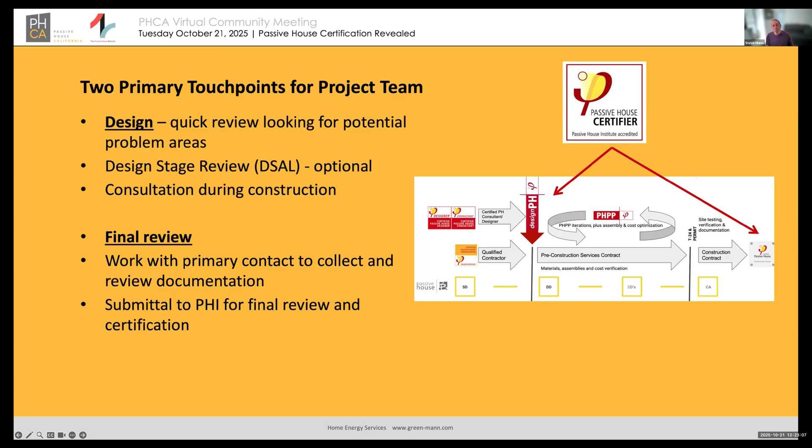Now, they reserve the right to review that final package. They may or may not do that. That's in our contract, that's an option. It happens sometimes. Other times, you send them a submittal package and it's like, fine, here's your certificate. So you never know what's going to happen, but that could be part of the process. Okay.

Let's talk about the big lift, the documentation requirements. There are basically 6 categories here. If you want to find out more, you want to download these 2 links. One is the building criteria. This is what you have to do in order to get a certified project. And the second one, the Passipedia document, is example documents. These are submittal requirements.

Question from Vincent: Am I more involved at the design stage for a remodel, e.g. to provide pre-certification? No, not really. Most of my projects are new construction. I've got a couple of remodels that I'm doing, and the amount of involvement as a certifier is about the same. It's not a big difference, really. I think that's a pretty accurate statement from my experience. My remodel experience is limited.

I'd say maybe 1 in 10 projects is a remodel. I'm doing 2 EnerPHits right now, maybe 3, maybe 4. I have to go back and look at my project list. So yes, I am doing some.

Okay, documentation. That's one thing. I'm just going to go through this. There's the documentation, there's the modeling plus auxiliary calculations, there's specifications, there's a bunch of MEP stuff, construction photos, and testing and commissioning reports. Those are the categories of the things you need to submit to a certifier.

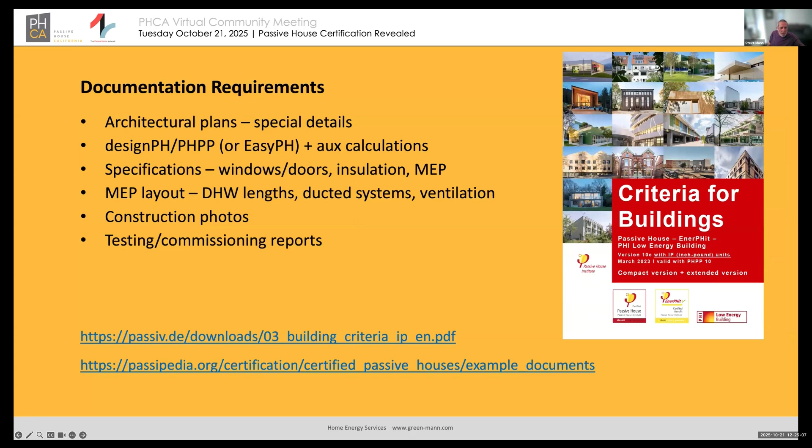Okay, architectural plans. The site plan has to have, and again, these samples that I'm showing here are from this second document here, the Passipedia document. So you don't need to study these slides. There's more information in the Passipedia document. I'd recommend you download it and read it. Okay. You have to have a true north designation. You have to show neighboring buildings. You have to show shading obstructions and an outline of the building highlighted.

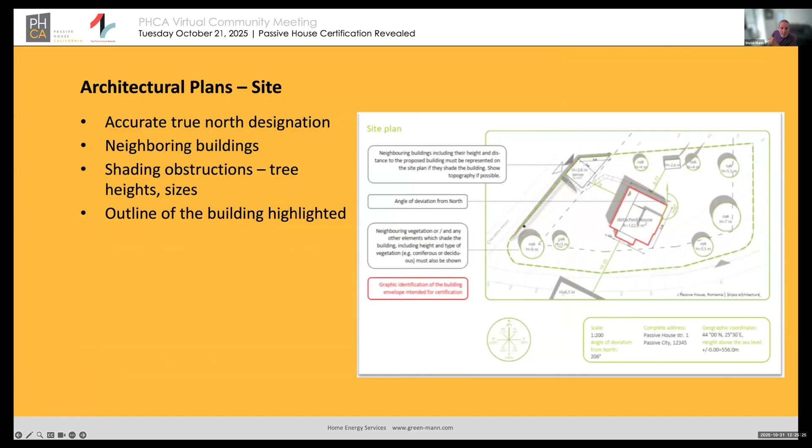Okay. For the floor plans, you need to outline the thermal envelope and the air barrier. And we typically recommend you do it in separate colors and identify them. Okay, and this is just one sample. We would like to see dimensions for the thermal barrier because that's really what we measure when we're certifying a building, and that's what the consultant should be measuring. Sometimes you get that, sometimes you don't. You know, as a certifier, you learn to deal with it.

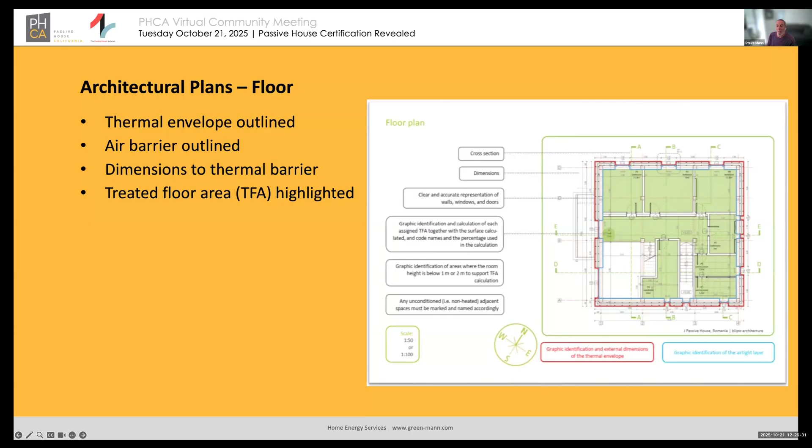The other thing we want to see is a treated floor area that's highlighted. Now, treated floor area is an interesting little art and science all to itself. You just have to figure out how to do it. I'm not going to delve into it any more than that. Okay, but we need a clear representation of what the treated floor area calculations are. We don't want to do those ourselves. The consultant or somebody needs to do that and make it clear, because all of the calculations in the PHPP, or virtually all of them, rely on an accurate treated floor area number. So that's got to be right on, 99 to 100% accurate. And we check that very closely.

On the sections, same things. We want the thermal barrier and the air barrier outlined. We want materials listed. Now, this can come up on the sections or it can come up on the details, and I'll show you details in a minute. Okay. Again, dimensions of the thermal barrier. And we want to see materials here that match the materials in the details.

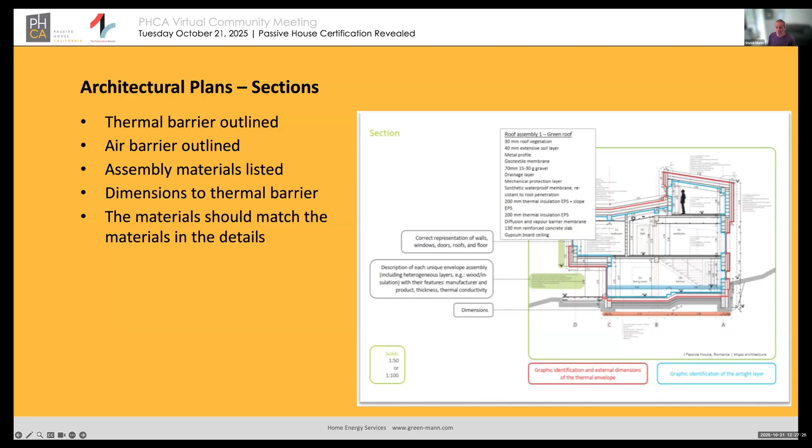If I see you identify, say, rock wool insulation on the outside in a section, but then in the details you call out plant-based material of some kind, it's clear to me that somebody's not keeping stuff up to date, and I don't know what you actually built. Okay, to me, that's a red flag that says somebody's not keeping track of stuff or taking care of business. So I'm going to look at things a lot more carefully because it's an indication of sloppy work. So I want the materials to match all the way through.

Here's a sample of some details. We need to see details again with the thermal and air barriers marked, the materials called out, dimensions, especially on door and window details. We want to see reveal dimensions because they can have a significant effect on your solar radiation. And again, I've already said this, the materials in the details should match the materials in the sections, and as you'll see later on, the materials in the specifications.

Mark, is this level of detail required for all projects, including EnerPHit? It seems like this level of detail is a major barrier to scaling passive house. Good question, Mark. It actually is a bit of a barrier initially. It is required because we need to know exactly what's in the building, you know, in all places.

What I found is once a project team, and especially a passive house consultant and an architect working together, have done this a few times, they develop a set of templates, a set of standard details. It's just like structural engineers. You get a set of structural plans, you get two plan sheets that are project specific, and then you get a third plan sheet that is basically boilerplate stuff that may or may not totally apply. The architects that I like working with are the ones that know how to do this, and it doesn't present a great burden to them. But the first time you do a project, and I've done this with some architects as well, it can be a pain in the butt, but it is pretty much required.

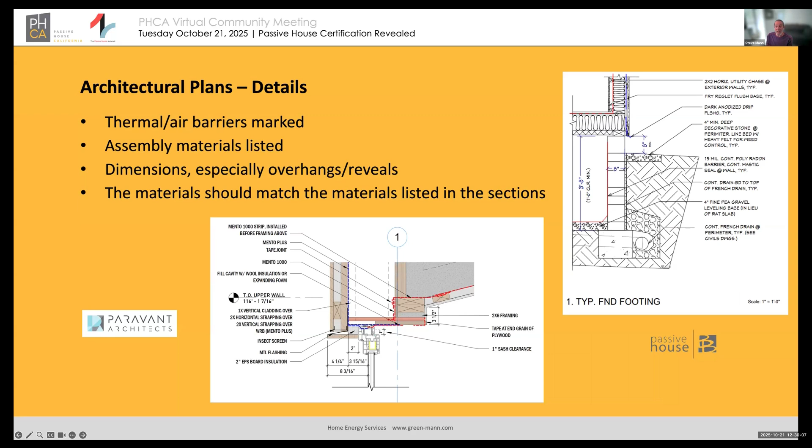What I do go to window manufacturers for are U-frame values and glazing specifications, that kind of stuff. But I don't really think they're in a position to provide you with installation details as shown here on the screen. If you can get them to do it, great, but they're going to have to match what's actually done. The chances of that happening are pretty limited, I'd say.

Okay, the nerdy stuff. We need a PHPP. That's the core numerical crunch document. It's got to be complete. It's got to be error-free, including the plausibility check. For the Passive House nerds out there that know about PHPP, there's a check worksheet that contains errors. If there's no errors there, that's great.

But there's a secondary section called a plausibility check that has additional commentary that's generated automatically, and somebody has to address those comments. And it might be things like questions about massing, or a large percentage of windows, or a small percentage of windows. And that needs to be addressed in order to get through certification.

You need a clear, accurate treated floor area calculation, a clear volume calculation, and in many cases, a ventilation design, which in most cases for single family is actually quite easy to do. And a lot of my architects actually do that. And as I'm a consultant, I do that as a consultant.

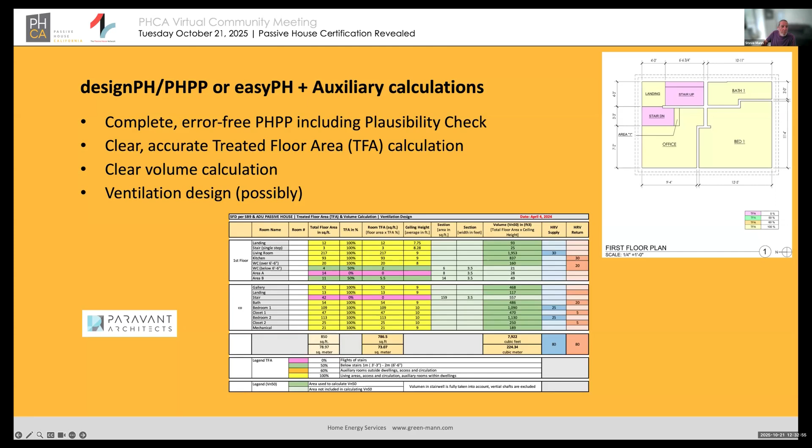Shading detail. Shading can be a real pain, unless you're in the plains in Kansas with nothing surrounding you at all. Generally, I have to go and get shading information from the project team. Now, the site plan should have some stuff, but generally they're not that accurate, and it's not going to contain all of the information you need. I need to see tree heights and the breadth of the tree envelope. And so I usually ask the project team to go out, take photos, measure the heights, put together a worksheet, and ideally put it into designPH.

For my money, Design PH is the only way to do accurate shading. And I'm at the point where I pretty much will not certify a project without a Design PH model, because there's just too much extra work involved, both for the nerd who's doing the number crunching and for me as the certifier. It especially has to do with things like terrain. There's really no good way to do terrain accurately with a secondary spreadsheet or something like that. It just doesn't work.

This is my personal opinion. Okay. There is a BC Canada book. Yes, haven't seen it. Don't look at it. It might actually apply. To my mind, every project is different, so the details are always different. And if a project team pulls stuff from a detailed book, great. They can refer that to me and they've got the information. I've never had that experience. Every project team does things differently in my personal experience. Okay.

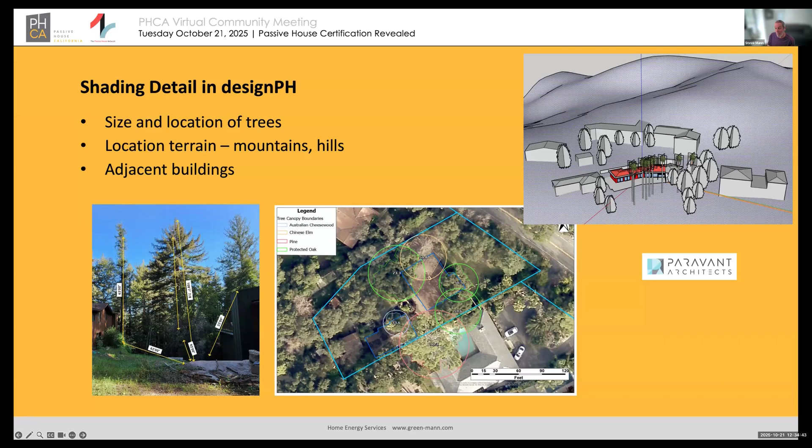Thermal bridge calculations. You could talk about books for thermal bridge calculations too. In theory, they are out there and you can pull from them. I've never had a project team do that either, because every project is unique as well. I encourage the team to put together a thermal bridge booklet where they identify all the thermal bridges tied back to the project details, okay, on the plan sheets. That's going to be thermal bridges plus door and window installations, plus building intersections, change of insulation layers, any place where there's a potential thermal bridge.

I like to see a catalog, and then depending on the nature of the thermal bridges, I ask them to tie those to a set of thermal bridge calculations. Ideally, the best thing to do is to do a thermal bridge free design, which is possible. In fact, I've had several teams that have been able to do that. You have to go into the project in schematic design thinking, I'm going to do a thermal bridge free design. And that sort of comes out of it. Okay. I'd say that's maybe a quarter of the projects that I've done.

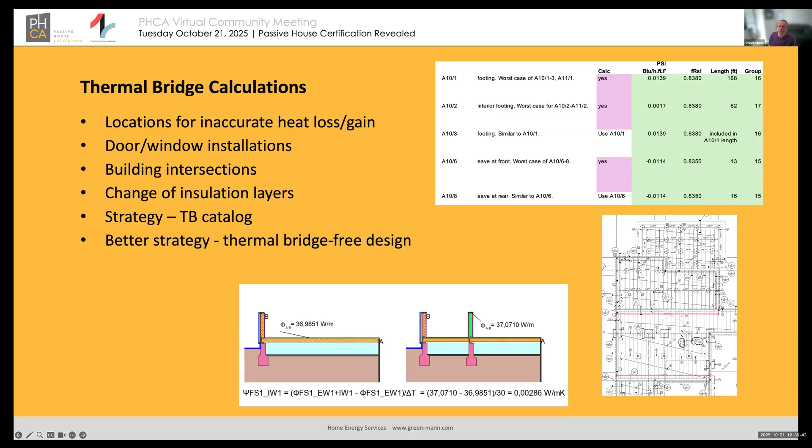Other than that, you do need to identify thermal bridges, document them, calculate them. And this could require a third party to calculate those. There aren't a lot of people that do thermal bridge calculations and do them correctly. Okay. Yes, I'll let the CEC commentary alone, and I'm not gonna talk about the book. I've never looked at that book. Oh, actually, Megan, yes, I have looked at that book. I have it, and I recommend it to all my clients. And it's got some generic details, but again, they don't apply to everything. It's good guidance, though. Okay.

Doors and windows, we need complete specifications. We need a schedule on the plans. We need a window order and/or shop drawings. We need consistent identifications and sizes. When I say I'm an auditor, I'd like to see a clear audit trail from the elevations to the project door and window schedules to the shop drawings to what's in the PHPP to what's in the designPH. And I'd like to see people use the same identifiers for every one of those, so that if I see something in the shop drawings, I can go and find it in the PHPP easily because it has the same name. Okay.

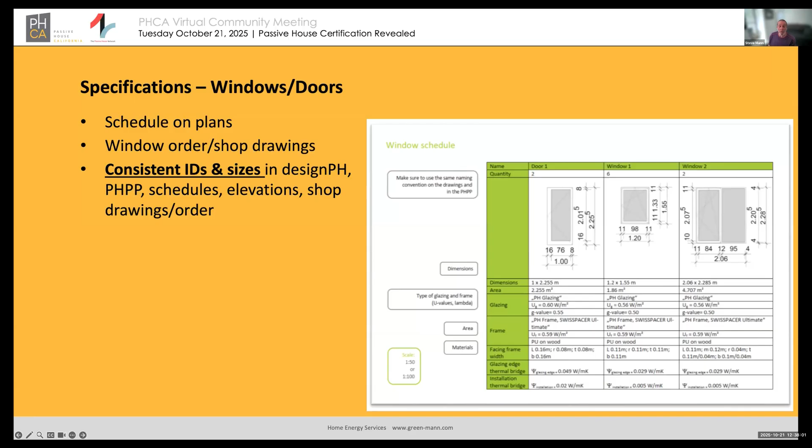This is not hard to do. It requires thinking about it while you're putting all this stuff together, starting with design and then all the way through project delivery. Okay. Some window manufacturers actually pull window IDs from the plans. They're my best friends because they make my life easy. Some of them don't. I'm going to look for this information, and if it's not there, somebody on the project team is going to have to provide it to me. We need glazing specifications, frame U-values, PHI certifications, if there are any, and install psi values if they're needed, and generally they're going to be needed. PHI is getting stricter about those.

NFRC numbers don't count. In California, the California Energy Commission requires you to use NFRC window and door values for energy code calculations. And I oftentimes have window manufacturers send those to me, or project teams send those to me, and I respond saying, nope, they're irrelevant. I need more details. And then I tell them what's needed. Oftentimes, the window manufacturers do have some of this stuff. Eventually, they provide all of it, or somebody provides all of it, but it's got to be very, very complete.

Let's see. Different about thermal bridge evaluation for California? Nothing. Why couldn't we use the BC numbers? You can if they match the project and if they're calculated properly. And Vincent, is there a directory of thermal bridge calculators?

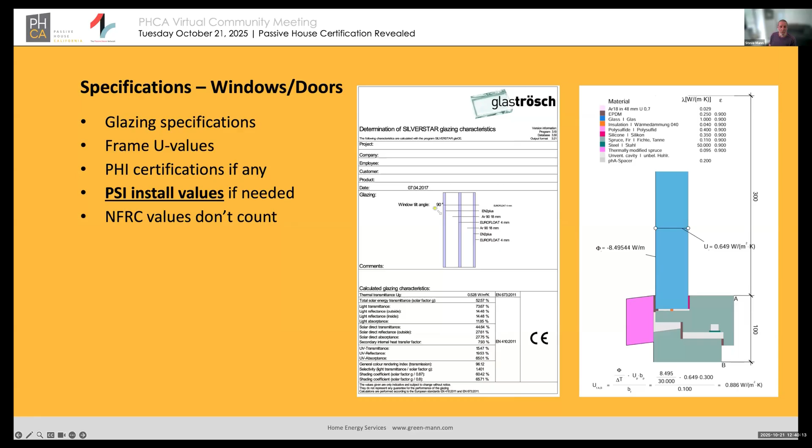Very detailed specifications on doors and windows. Installation, we need to know exactly what's being installed. Okay, Robert. Yeah, PH Canada offers calculations. So does Passive House Institute too, if you want to go with them. I've used them on one project. They do fine work. I've never used PH Canada.

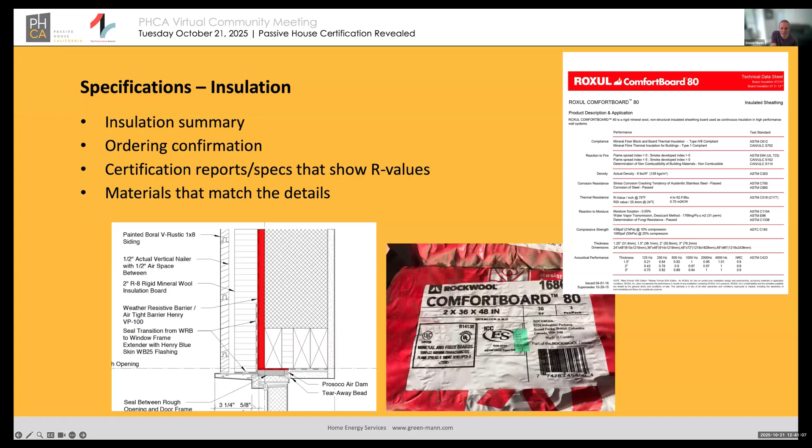Okay. For insulation, we need a summary of what's installed. We need stuff called out on the details. We need specifications for each insulation product with either a certification report, like an ICC-ES report, or legitimate, well thought out specifications that show the R values. And again, the materials in the details need to match the specifications that you provide, need to match the pictures of the insulation that's delivered on site. Okay, again, we need a clean, clear audit trail from concept through to execution.

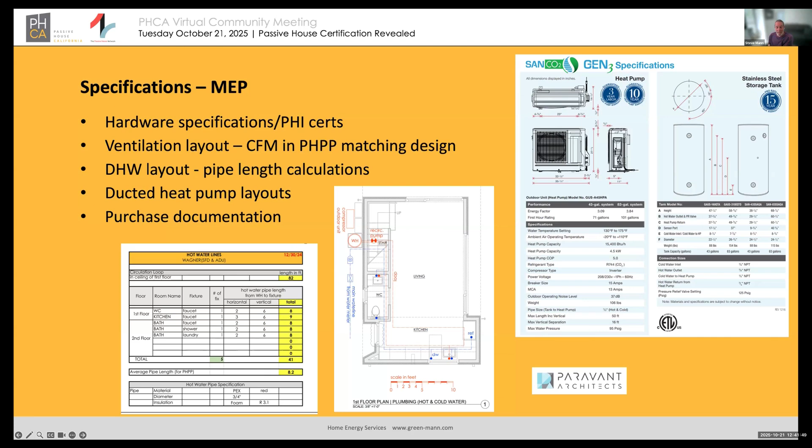Mechanical, similar kinds of depth. We need all the hardware specifications. We need PHI certifications if they exist, and they probably will for the ventilation equipment. We need a ventilation layout. We need a domestic hot water layout with pipe length calculations. If you had ducted heating and cooling systems, we need the duct layouts. And we need purchase documentation that shows that, yes, you said you were going to install this hot water heater. Here's the purchase documentation. And in the photos, we're going to want to see a picture of that same piece of equipment. Okay.

Then for the builders, we need construction photos. Here's a link to an official PHI list of construction photos. Every certifier has a different way of approaching construction photos. I know this from experience. Some are more complicated, some are less complicated. I think if you use this official list, you should be in pretty good condition. Essentially, what we're looking for are photos of the air sealing details, the insulation details with rulers showing the depth of the insulation, window installation, the mechanical installation, and shading obstructions.

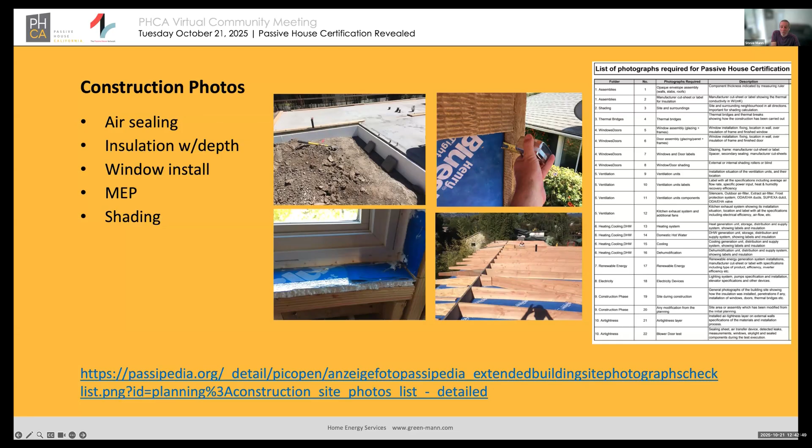Now, for shading, this is going to be surrounding shading. An official requirement for the photo list is photos of the building surroundings taken from the building surfaces to the outside, so that we can just double check all the shading information that we previously saw in the modeling. Okay.

Testing and commissioning reports. We need a blower door test, and it has to be done using ISO 9972 method 1. Nothing else is acceptable. And we need an official signed report that says, yes, this was done using the ISO method, and it shows the calculations and all of that stuff. For the ventilation, we need a signed ventilation report by somebody. Okay. Now, there is no such thing as a certified ventilation technician. Well, we can slice and dice what I just said. But anybody who has the equipment and is qualified to do these measurements can do that.

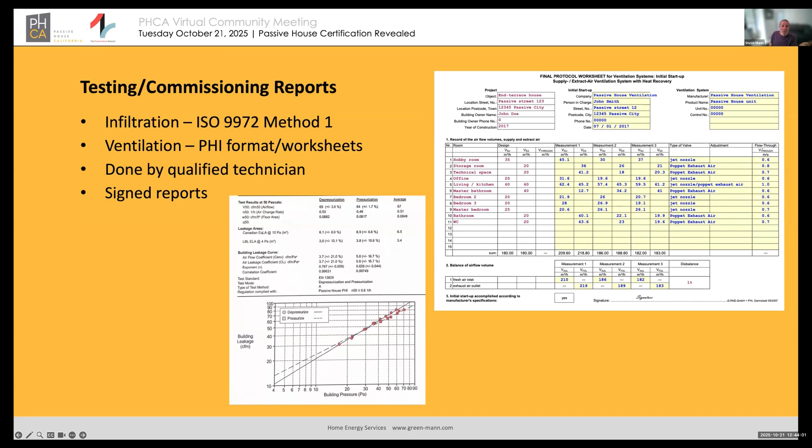I've had Passive House designers do the ventilation commissioning. I've had California HERS raters do the blower door testing. Okay. I've had people that just have the equipment do the blower door testing. So as long as they know what they're doing and they can clearly show that, currently, that's okay. There's no written qualifications. And the reports have to be signed by whoever did them.

Okay. All right. So this is the quick and dirty. This is everything you have to do. And like I said, there's nuances that I haven't really touched on. They come up once you dig into a project. Okay, so if you want to make this as simple as possible, here's a few recommendations. And this is my personal take. Okay, everybody's different. Every certifier is different. Every project's different.

This is what I like to see. One point of contact. That doesn't mean that I won't talk to the other project members, but I'd like to have one person that's generally responsible for delivering the documentation to me. It can be the designer, it can be the architect, it can be the nerd, the consultant, it could be a secondary team member. I don't care. I just don't want to have extended conversations with 5 or 6 people about the documentation. It's not an effective use of anybody's time.

I would encourage you to ask the certifier how they want the data delivered. Some people like to set up drop boxes. That's my preferred method. Some people just like to have documents sent by email. I'm okay with that. Some clients like to set up their own Dropbox and manage it on their end. I prefer to do it on my end, but I'm open to suggestions. But we need to have that conversation to make sure that whatever method we agree on, we're going to use.